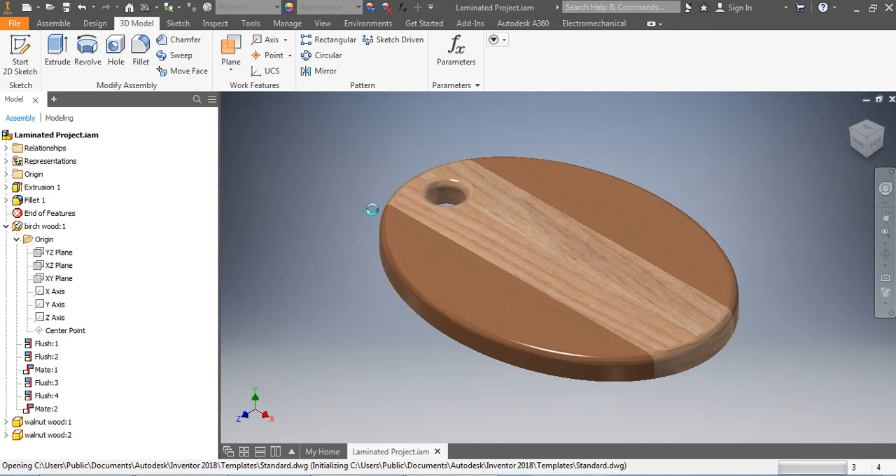To start off with, I'm going to come up to File, and drop down and go to Drawing. When the drawing starts up, it's basically a piece of paper that we're going to print out on a printer so you can work from it. You're not going to use your computer all the time to look at sizes. So the first thing I'm going to do is go to the sheet, right mouse click, go to Edit Sheet, and change this from D size to C size.

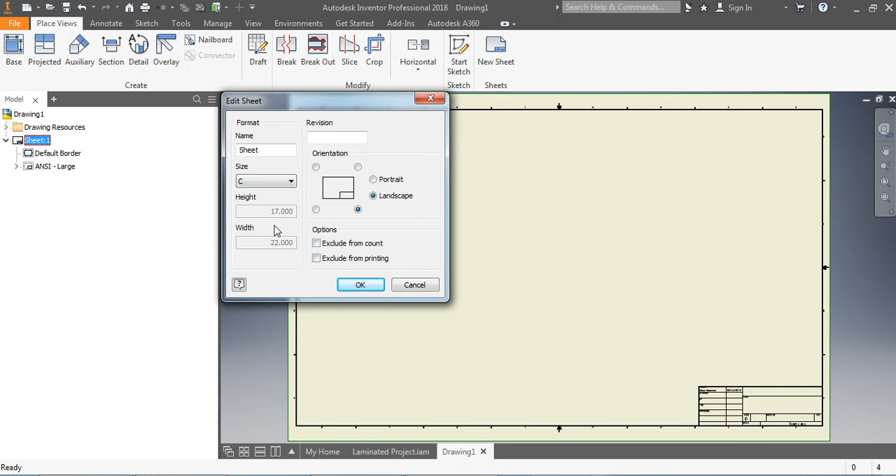Why? Because 17 by 22 is way too big for the printer we're printing out on, but when we scale it, it fits nicely on paper, which is 8.5 by 11. Half of this is 11, half of that's 8.5. So we just click OK.

There's our paper. Now all we do is go to Base, and our project, if it's open, should come in like this, and you can see it's going to fit here. This is our front view, this is our side view, and this is our top view. Automatically you can see it's at half scale.

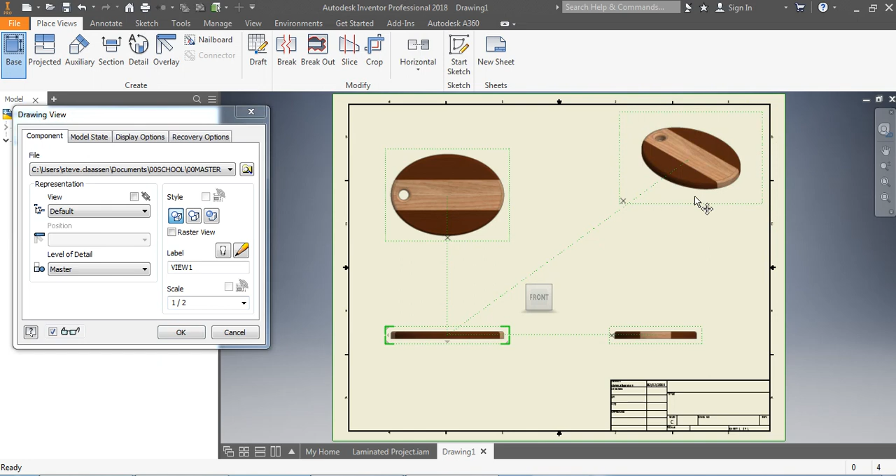If I come in and go 1:1, it's probably going to be too big for the screen. Yeah, it is. So I'll go half scale. And then the last view I want, up in here, is just a 3D visual of it, because sometimes it looks a little easier to see what it is when it's in 3D. This is called isometric view. So we're going to click OK.

The views come in now. The whole point of this is to add dimensions so we know what we're doing and how big things are. So we come up to Annotate, and from Annotate you go Dimension. What do we need for dimensions? Well, the first dimension we probably need is how big is this thing overall from here to there?

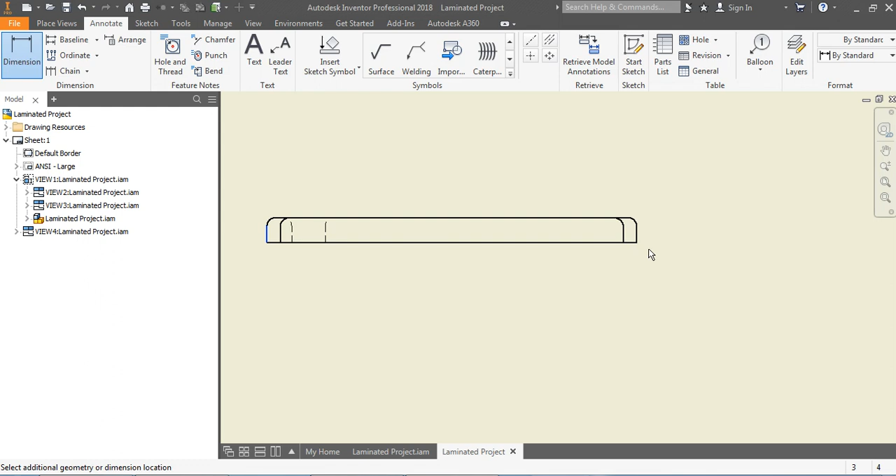Well, it's 11 inches. And how thick is it from here to here? Well, that's 3/4 of an inch. So that's all we're going to put on that one.

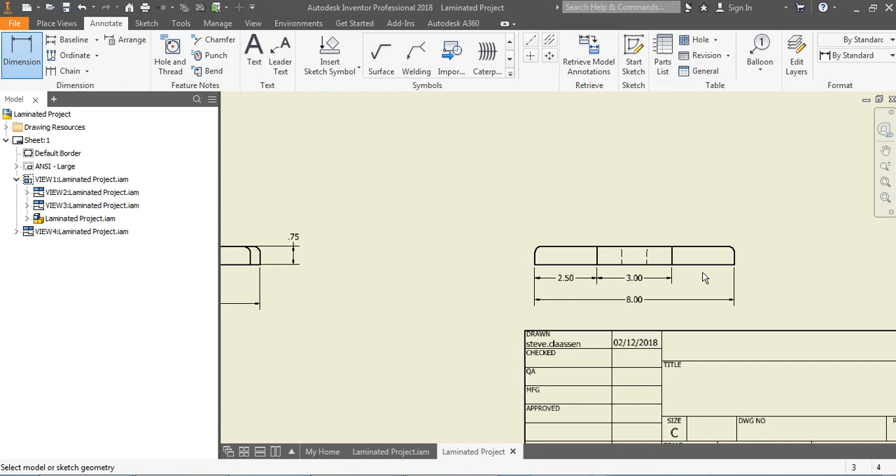Over this one here, we're going to go how far is it from here all the way over? I'm going to say, okay, so it's 8. And then the other one I've got to figure out is from center to here, how big is it? Should be 3. And the other one is from this edge here to here, it's 2.5. Don't need to put the last one here because you can figure out 2.5, 3 is 2.5.

And the last thing we got to do is on here, there's a radius here. So we're going to click, and that's a 1/4 inch radius. Okay, so those are some dimensions there.

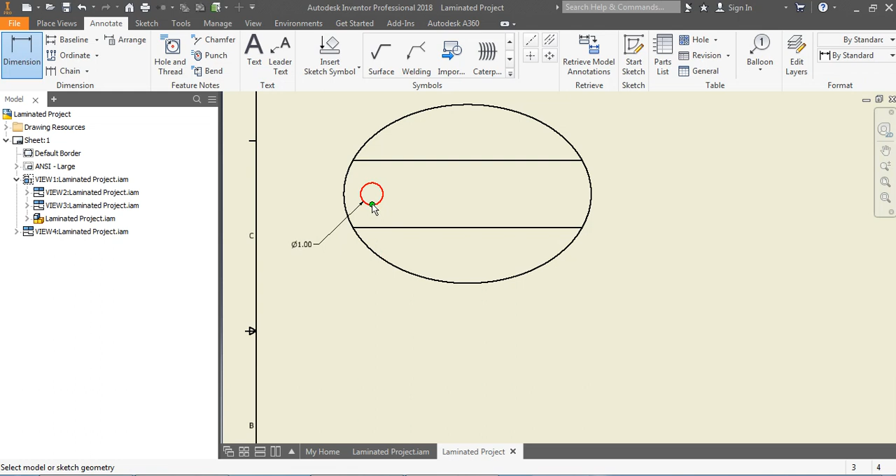Don't worry about layout yet. And then up here, we need to figure out, well, how big is this diameter? So we pick it. It's 1. And the only other dimension we might want to know is how far from this edge it is over, so from this edge to the center. That's 1.25. So I'm going to put this one here.

Now I'm going to hit Escape to get out of drawing. You see it, we're in dimensioning mode, so I'm going to hit Escape to get rid of it. And I'm going to grab this one and move it out of the way. Hang on, it does not want to move for me.

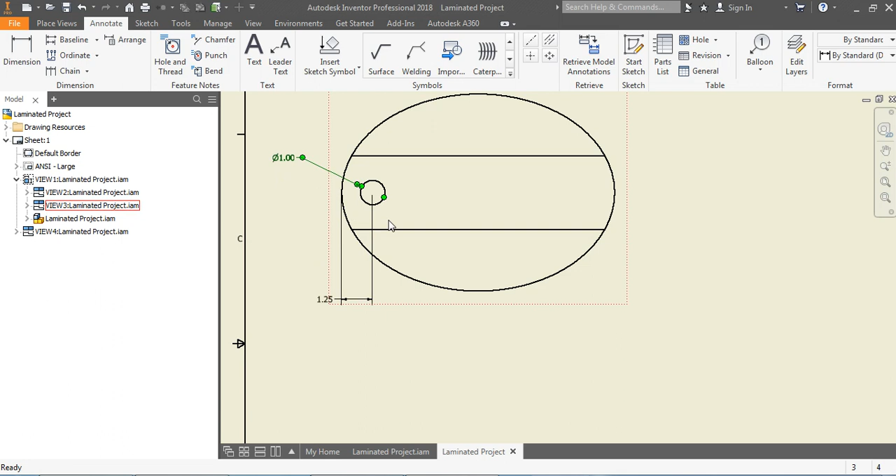So there we go, we're going to put that one up there so the dimensions aren't crossing. Now we know the distance from the edge into the center, we know the diameter of that, and we know how thick it is here, or how wide each piece is, because we've dimensioned them there. You could have dimensioned them up here, doesn't really matter.

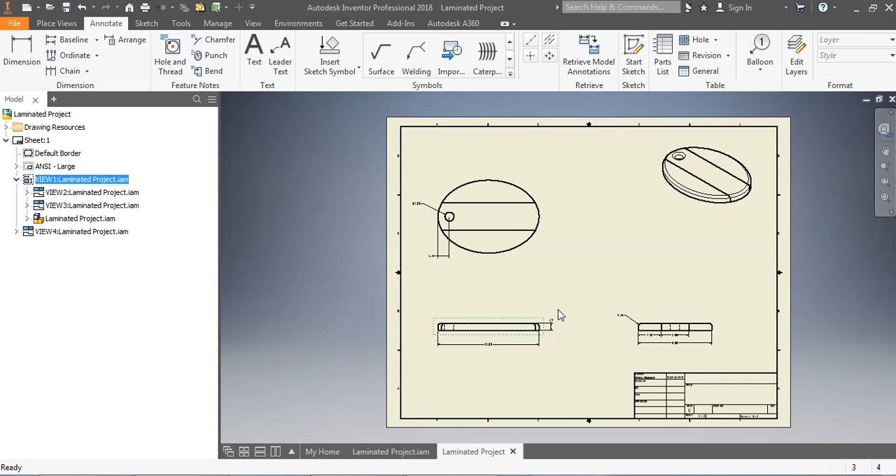All I'm going to do here is take this one, you can see I'm highlighting, I'm just going to move it up. You can see everything automatically changes. So we've got that. Now we're going to zoom in, we're going to add some text.

You can see my name's here. This comes off the network and it's going to put your student number, and that doesn't help us. So we're going to go text, put the text in here - in this case, this is actually a cutting board, so we're going to put cutting board.

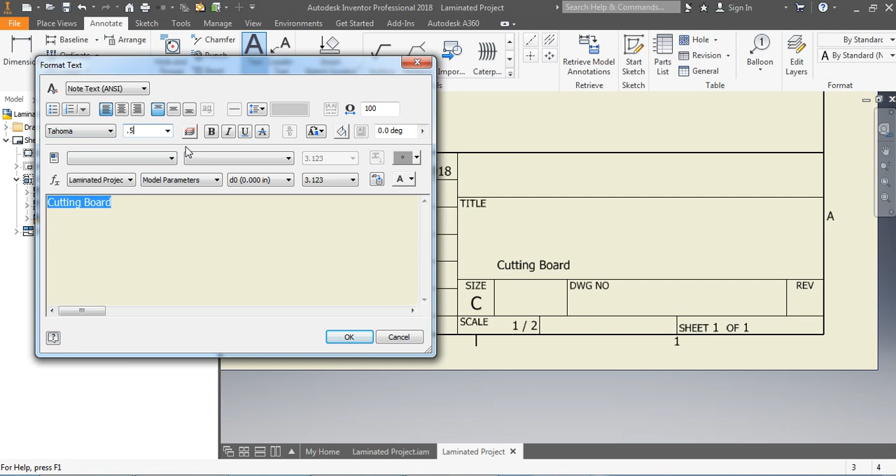Now you can see how small it is. I'm going to highlight it, so I'm just going to move this over here. And I'm going to put the text, and I'm going to put 0.5 here. As soon as I put 0.5 and hit enter, you can see it goes bigger. I'm still in text, so I hit Escape, and then I can just grab this and center it.

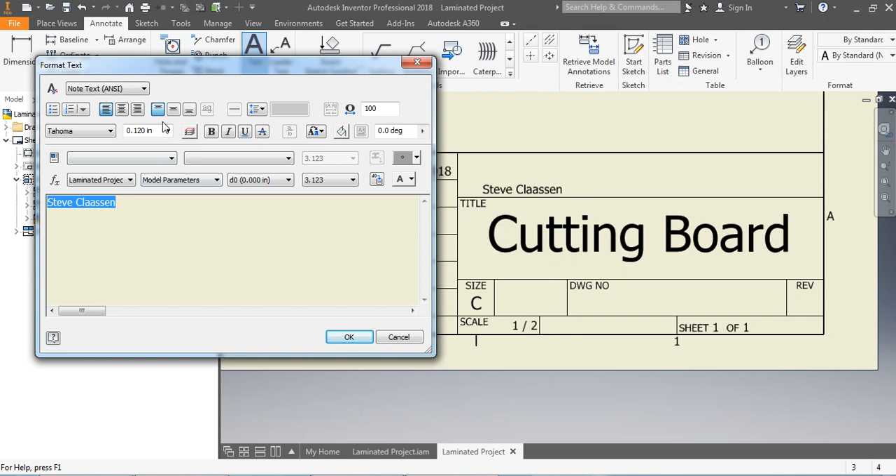And then up here, you're going to put your name. So go back to text, click, and it comes up, and I'm going to put, oh no, I'll just put my first name, Steve. So there's my name. Highlighted it a bit too small, well, that's probably big enough, sure, what the heck. I have to hit OK to move it, and then hit Escape to get out of it, and then I can put my name there.

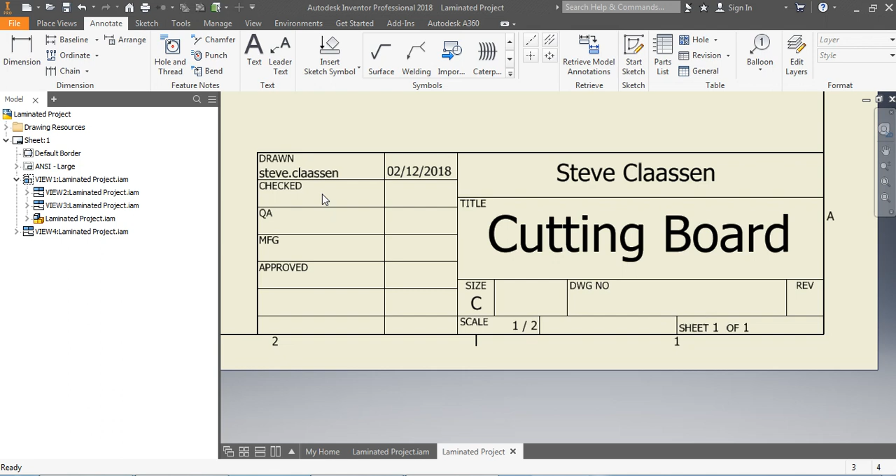Okay, so that's basically it for that. C-size paper, scale is half, drawing number - this just refers to there might be 40 different drawings. Checked by - if someone had to check it, they'd put their names, things like that.

So the last thing we're going to do on this drawing is we're going to go text. I'm going to pick here, and I'm going to put all dimensions in inches, because that's really important, because nobody knows what units those are.

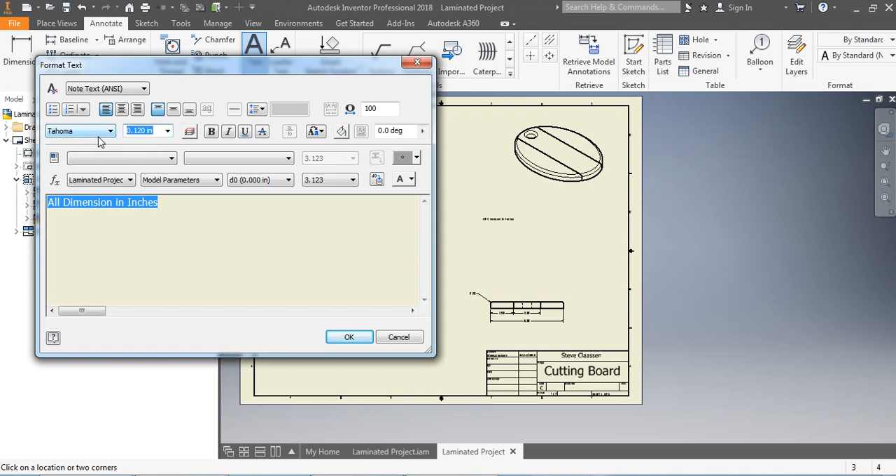So highlight that, and I'm going to put this, I don't know, 0.25 high, that's probably big enough. And I'm just going to move this now, and I'll put it up here somewhere. Yours doesn't have to look exactly like mine, but it should look something like this. All right, and that basically completes this tutorial on making a working drawing.